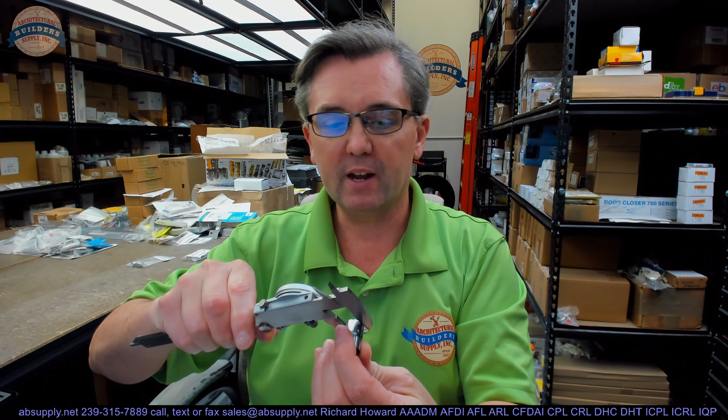Replacement push button, and that's how they end up needing to be replaced because they're damaged. Overall length about 15/16. Outside diameter of the exposed part about 0.624, so 5/8. The part that's concealed about 0.583.

Now, why would you end up needing a replacement push button? Well, damage. This will work on a push button function like a privacy set, and sometimes that door can get so forcefully pushed open that the button will become dented, damaged, things of that nature. Perhaps it's been vandalized. Generally unintentional contact with a wall, severe, and it causes this to no longer function inside of the lock because it's been deformed, pushed in, crushed, or dimpled in such a way that it doesn't pop in and out nice inside the knob. Or maybe the components behind it are also damaged.

Let's switch to the screen view and let's take a closer look at the supporting information.

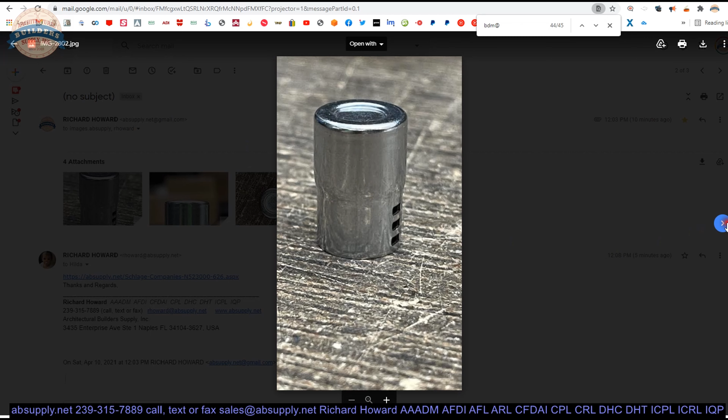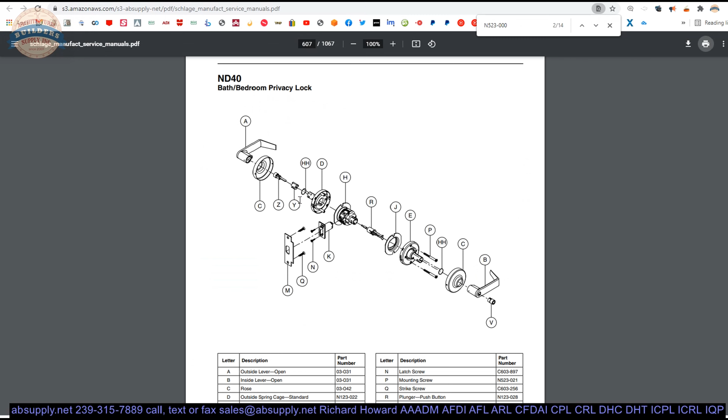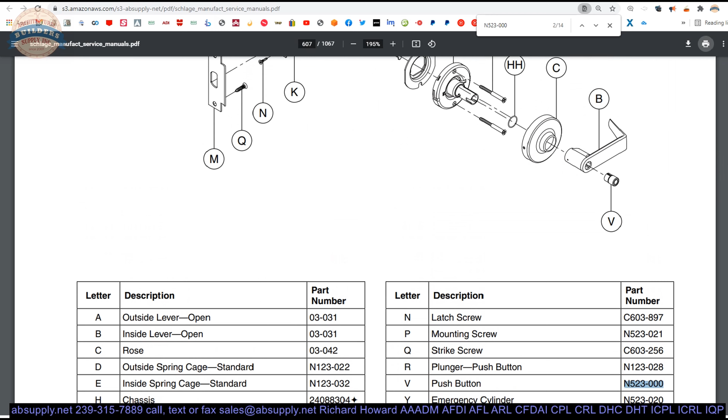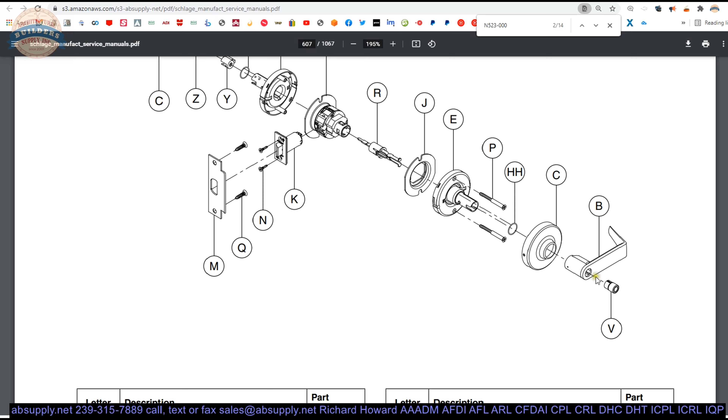Now, there's an important document below as well. That's the parts drawing, but this is a parts drawing from just one function of lock, the ND40, the grade 1 lever, showing you part V, quite definitely where it is used overall. It's going to connect to part R, and part R is our plunger. Those two tangs that you'll pinch in will set inside of those slots that are there. Multiple slots, probably for multiple different door thicknesses. Probably is why those are there, would be my guess. So this parts drawing will allow you to look at all of the parts for this function.

Now, you might need to see the parts drawing of a different function, even though you still need the N523-000. Below this video here is a link to the manufacturer's page, and when you click on that, you'll be able to pull up not only all of the Schlage products that we sell by means of this horizontal navigation, but also a link to the manufacturer's website, as well as a link to their catalog, and several other encyclopedic documents are on this page.

There's dozens of them. A couple that I would mention would be the Primus Service Manual, installation instructions, sample letter of authorization if you're ordering restricted key blanks. We have some older versions of the catalog here, 1972, 1982. But that service manual, kept up towards the top of the page, is 1,000+ pages of parts manuals when it comes to Schlage locks.

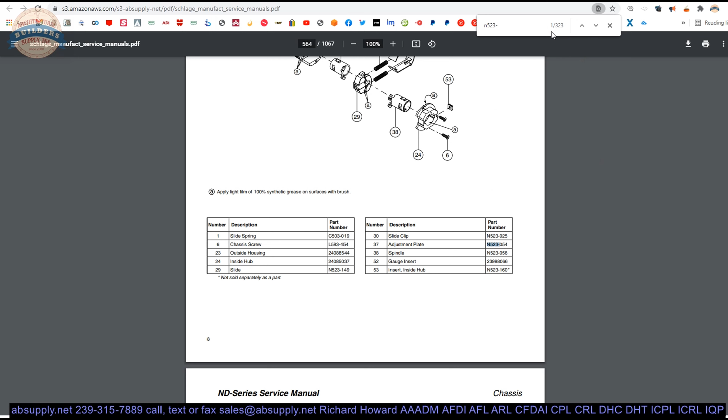Current, as far as we know, the D-Series knob, they've unfortunately discontinued that lock. I can understand why, it's a knob. But anyway, when this 1,000+ page document loads, you can do a Control F or find function for N523 and allow the document to be indexed. It'll take a few seconds as it searches through there for all of the N523s, and it starts to find all of them. Dash, add another character, and it will refine the search until you get to 3 zeros, and then it'll locate all of those matches in this document.

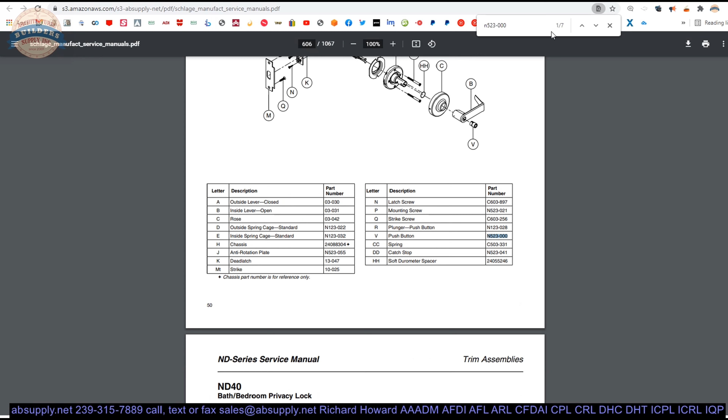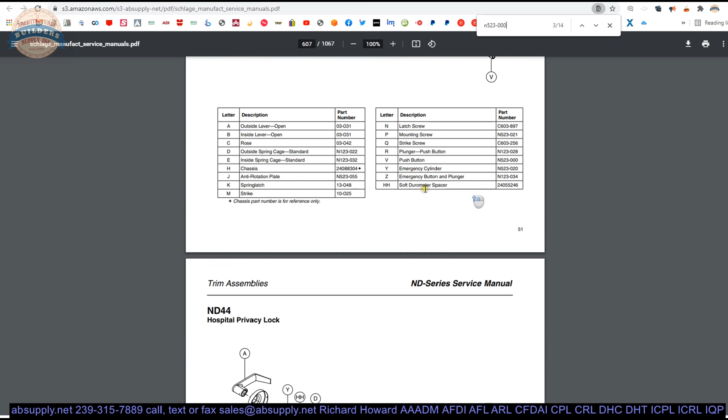There are 14 of them, apparently. 14 times this shows up. So it shows up in the ND30 patio lock. It shows up in our ND40. It shows up in our ND44. Probably the ND50 would be my guess. Yep, ND50 right there. ND73. You get the picture, lots of different parts manuals here for you to review.

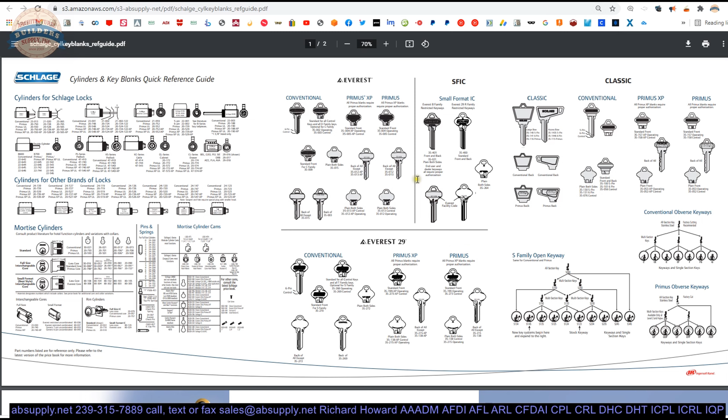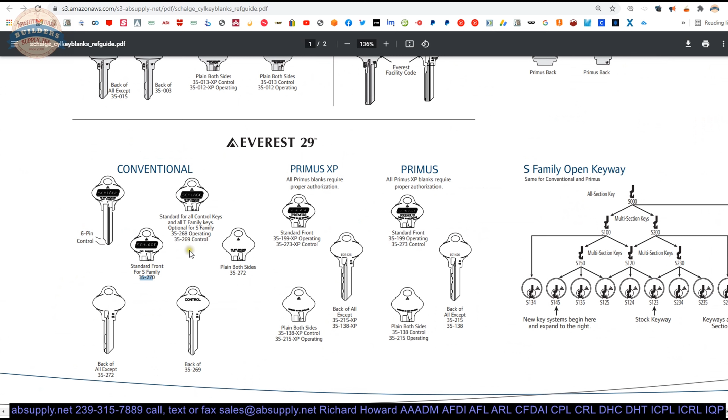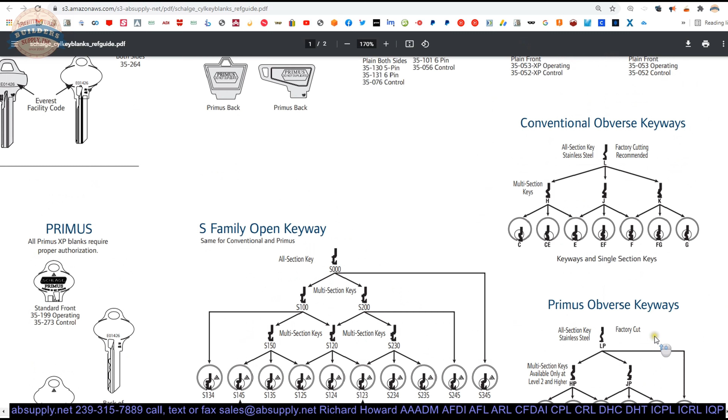Everest S family key blanks. They show Primus keyways here as well. Schlage also has a reverse of all of these as well, different letters, I don't remember. I never really knew the reverse of C. It might be D, don't quote me, I just don't recall. That's a relatively easy trip down into a Reddit or a locksmithing forum to find that stuff, or contacting Schlage, but if it's just academic your pursuit, I'd probably just recommend finding it online. Cylinders are also listed here as well.

Handy document. Let's wrap up this video on camera.